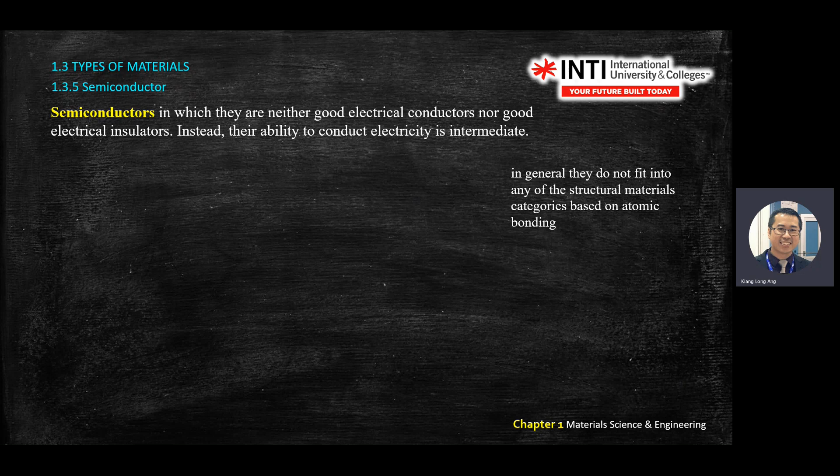So semiconductors are neither good electricity conductors nor good electricity insulators. Right? It depends on how you make them. Okay. So their ability to conduct electricity is intermediate, meaning they are between conductor and insulator. They're in the middle of conductor and insulator.

So if you look at the periodic table, they highlight the main ingredients that can make up a semiconductor. So you have those light blue here and a bit deep blue. All these highlighted elements can form semiconductors. The description you can read from the slides, but at least you can identify the elements that can form a semiconductor. Keyword for semiconductor, again, they are intermediate in their conductivity, between conductor and insulator.

Take note that semiconductors do not fit into any structural material categories. You cannot group semiconductors based on their atomic bonding. You know atomic bonding from your chemistry: single bond, double bond, triple bond, ionic bonding, covalent bonding. You cannot group semiconductors based on atomic bonding.

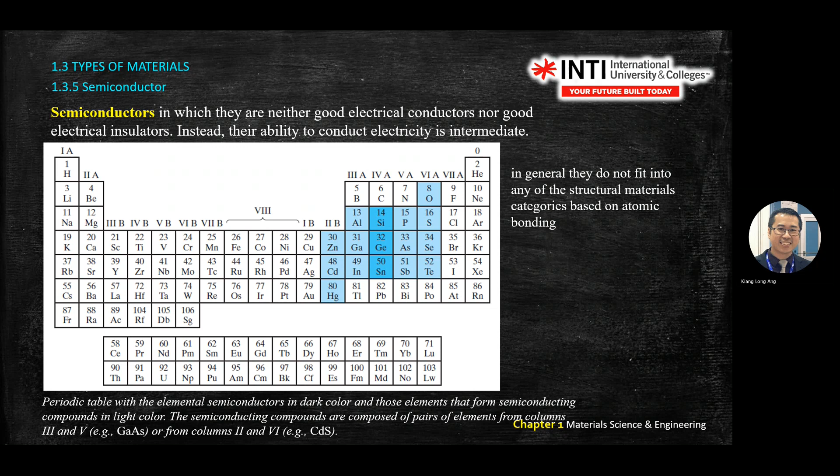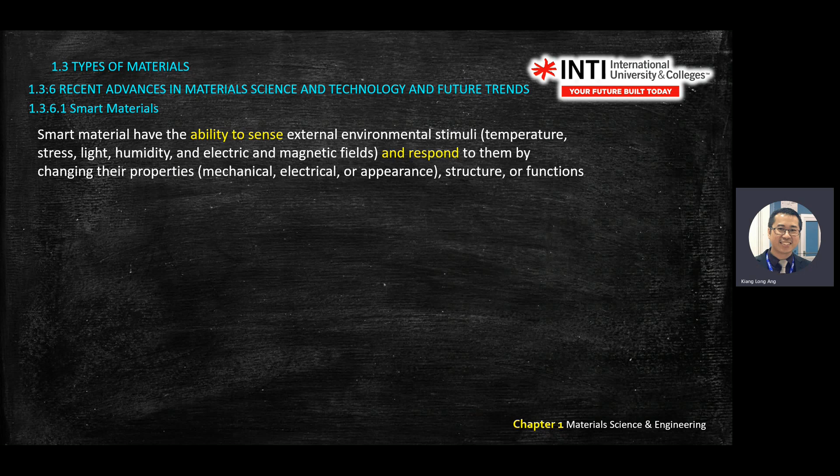Then this one is another add-in material, something we call smart material. In recent years, I think it's time that you are exposed to all these advanced materials. One of them is called smart material. Smart materials can sense and then react. They can sense and respond to the environment. Respond either by smell, color, mechanical properties, movement, motion, and so on.

Okay, so for applications, there are two big categories under smart material: sensor and actuator. A sensor means something that can sense a change. Sometimes smart materials just change color. For example, because I'm from the aerospace industry, if you take an aircraft, different heights have different temperatures, right? So as it becomes colder and colder, you can observe the wing color change. This is one of the applications of smart material.

Actuator means something that you push. A very traditional actuator is your syringe. You inject a vaccine with a syringe, that is an actuator. But that is very old tech. Normally we won't use actuator for the syringe. An actuator is something that can move. You pump in hydraulic movement and all this, then it becomes an actuator.

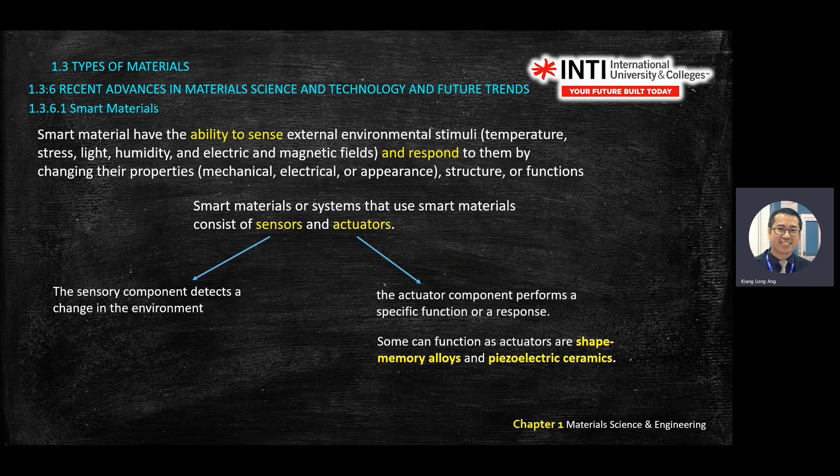In recent years, we go into nanotechnologies. So we have a lot of small robots that you can use for medical purposes. All these tiny robots or nano robots are smart materials that function as an actuator. Okay, so this is another smart material used in biomedical application.

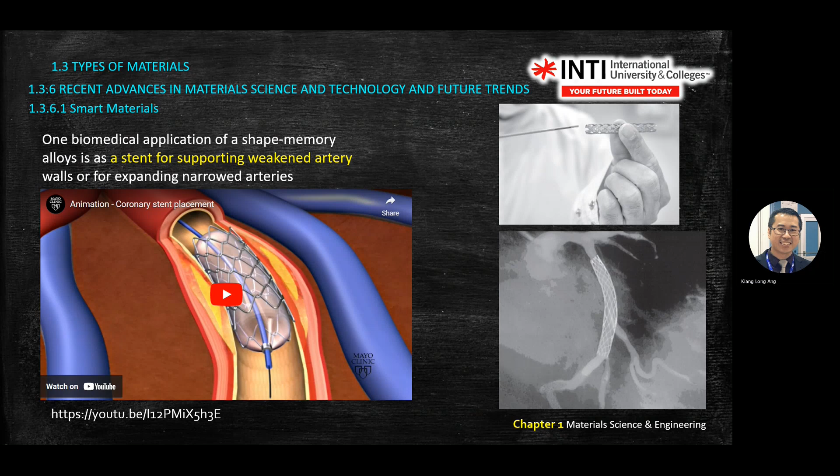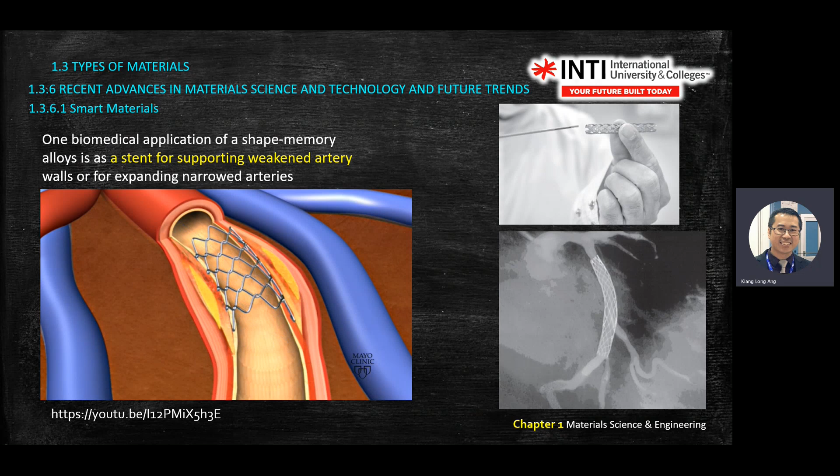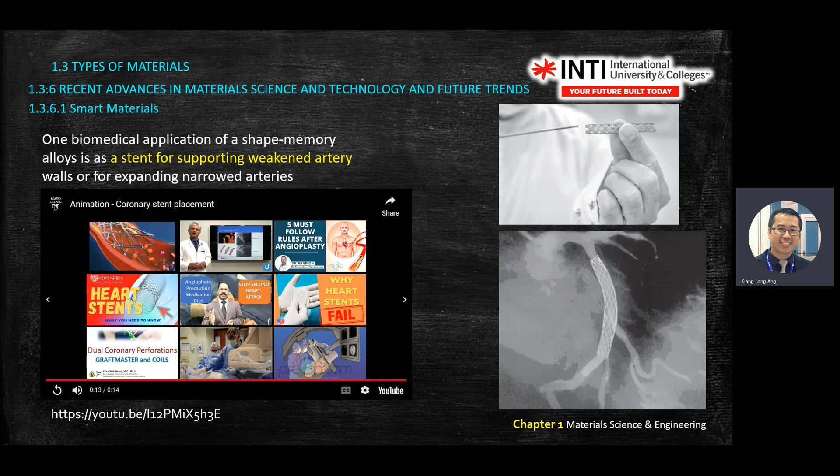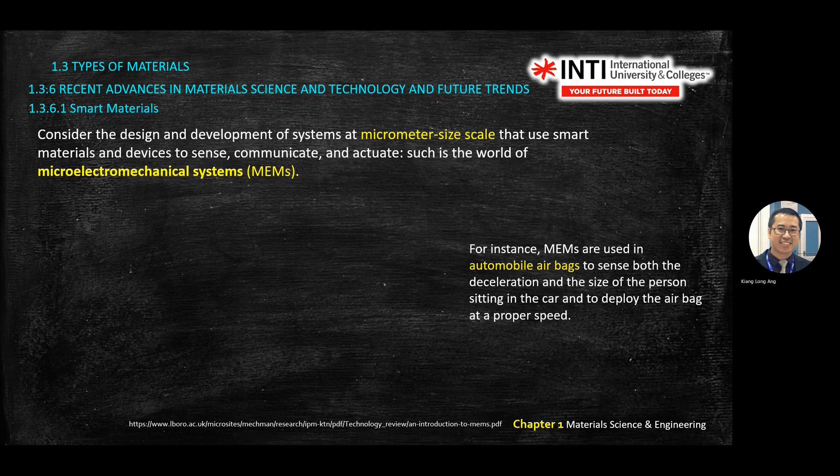So another example of smart material is called MEMS. If you go into the semiconductor industry, this is very related to mechanical properties, especially materials. MEMS stands for micro electromechanical system. For example, car airbags. MEMS are installed as a sensor. So if there's a high impact or the velocity changes beyond a certain limit, then the MEMS will react to that environment.

Okay, so this is one example of how they make MEMS. Micro means very small, 10 to the power negative 6, micro electromechanical system. One of them is the automotive airbag. So this is the automotive airbag MEMS. If you look under a microscope, there are a few layers, up to 5 layers.

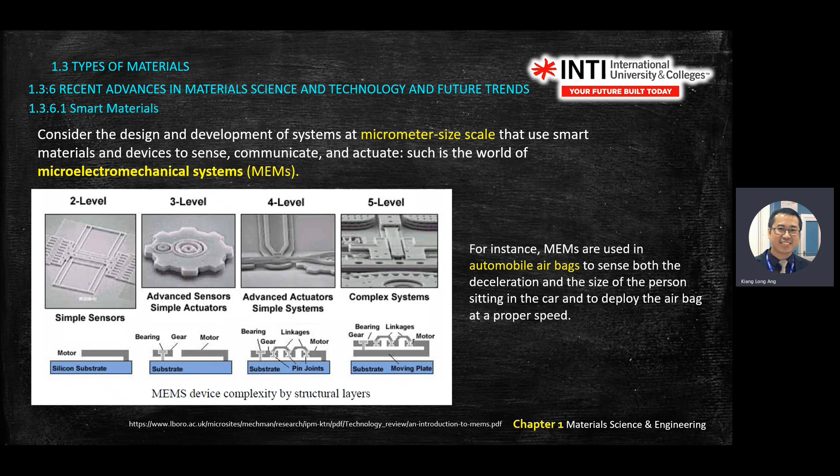Inside our smart cars nowadays, we use a lot of MEMS sensors. Airbag sensor, tire monitoring, all this. Pressure that you press on a material, then it gives you some reading. That also falls under smart material. Okay. So again, we looked into two classes, sensor and actuator. This is an example of application.

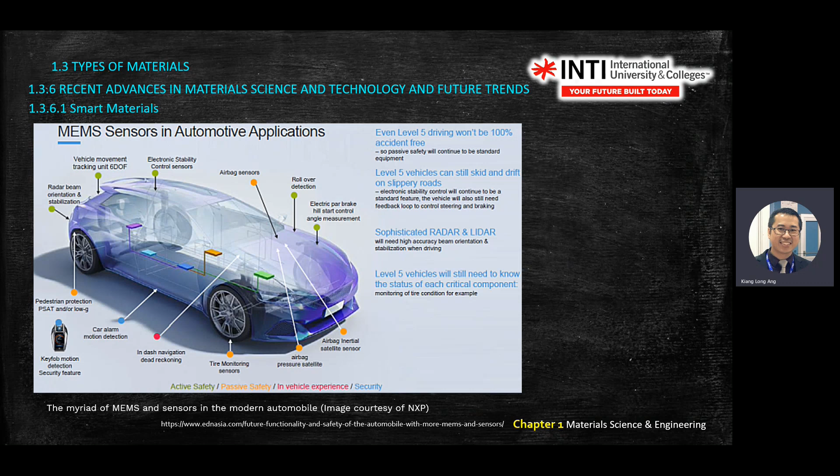Of course, I don't think I will ask you about smart material. Some lecturers, when they teach this material, take the smart material topic and give it as an assignment. But my way is a bit different. So I won't ask you to write a long essay.

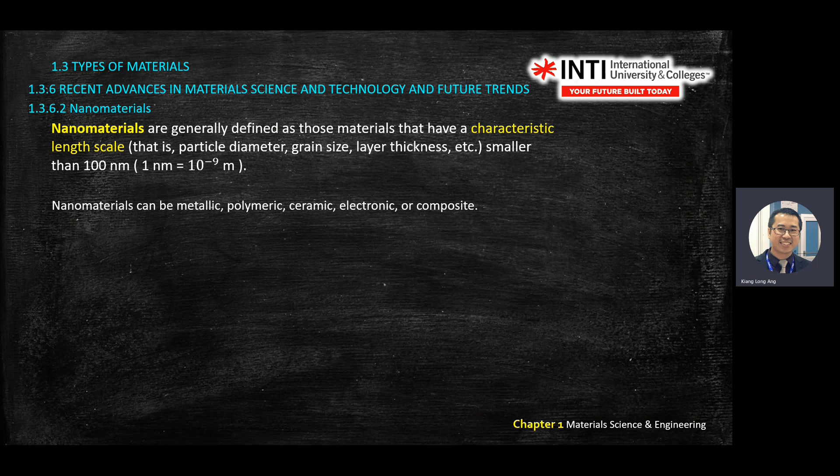Okay, nanomaterial is something at 10 to the power negative 9 sizes. So how you define a nanomaterial is that the size is below 100 nanometres. Okay.

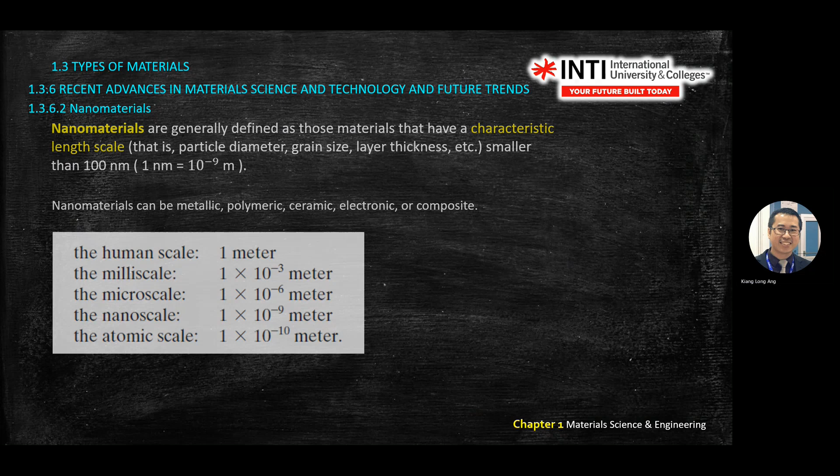Nanomaterial. This falls under microscope. You can see the microstructure. All this you read, because I won't ask you this question or for these slides. But I need to feed you some information about the advanced material.

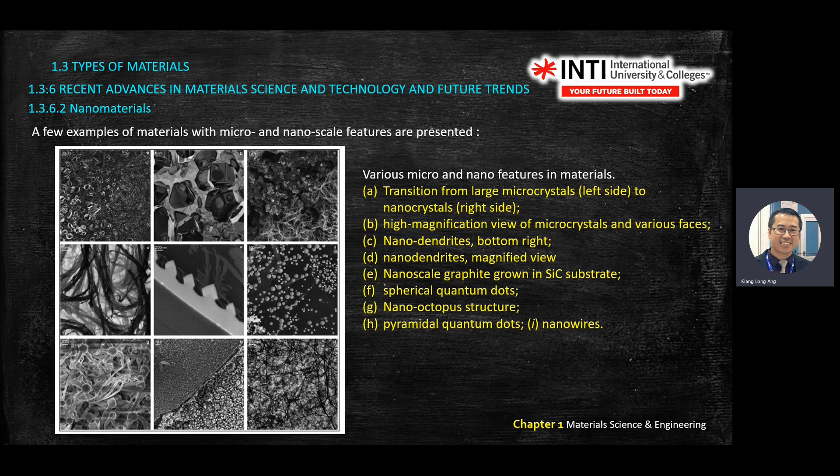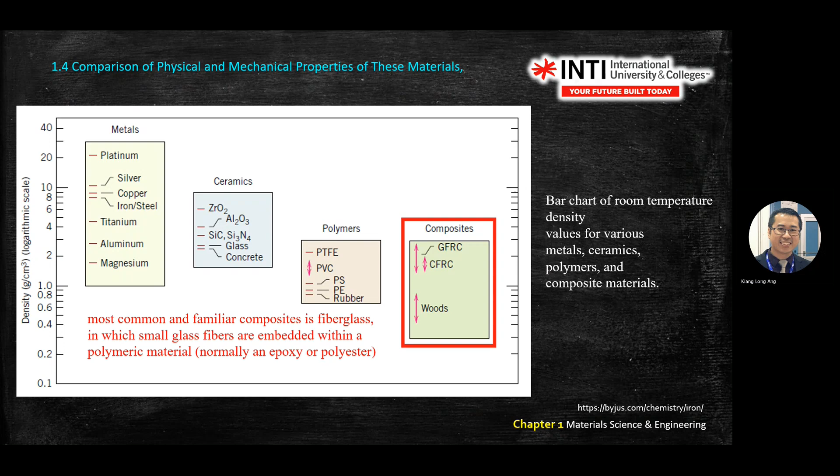Next graph. Just now was density. Now we look at stiffness modulus, or elastic modulus, Young's modulus. You learned about Young's modulus in your statics, right? Yes, no? Can you recall what is Young's modulus? No. Or you haven't learned? Okay.

Talk about force first. You can have pulling force. The term for pulling force, we call it tensile force. Then you have force going in, compressing the body, we call it compressive force. Then you will have twisting, we call it torsion. And let's say this is fixed. In your statics, you learn this symbol, it means fixed to the ground, and you have a force here, it will do bending.

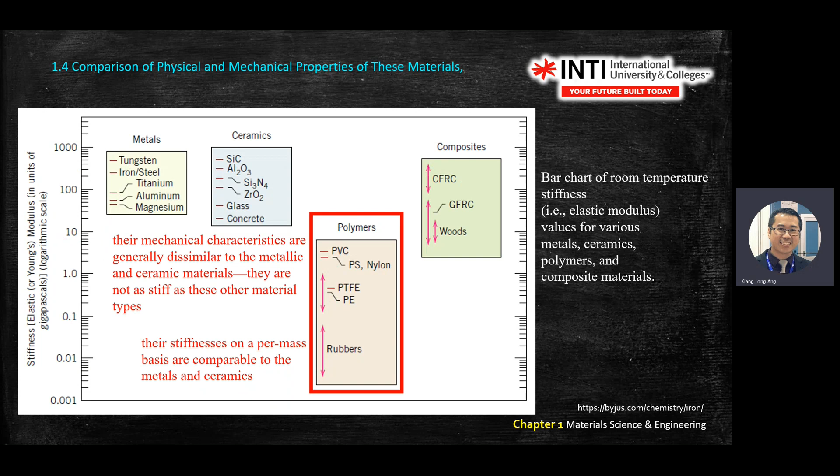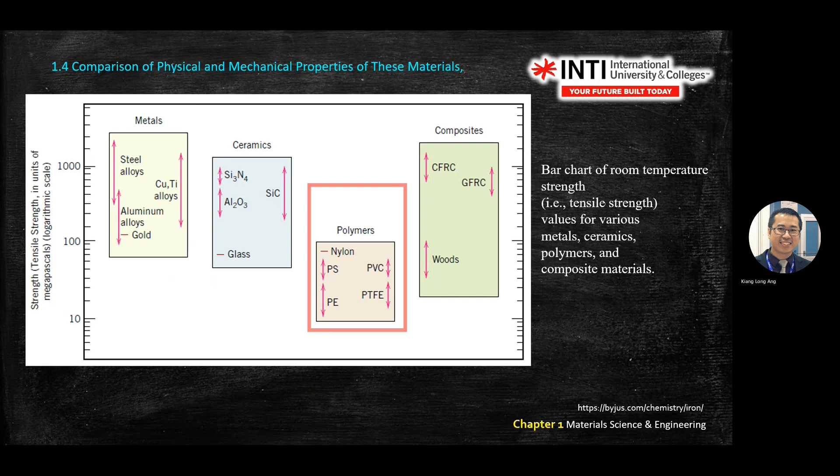So this is an example of the thing. So how useful is all this graph, or how do we ask you a question using these 4 or 5 graphs here? Normally it asks you to explain - these 3 graphs normally come up in application, section C in the final, about application, selection of material.

Selection of material - so it gives you a scenario. It gives you a scenario, for example it gives you strength, an X value.

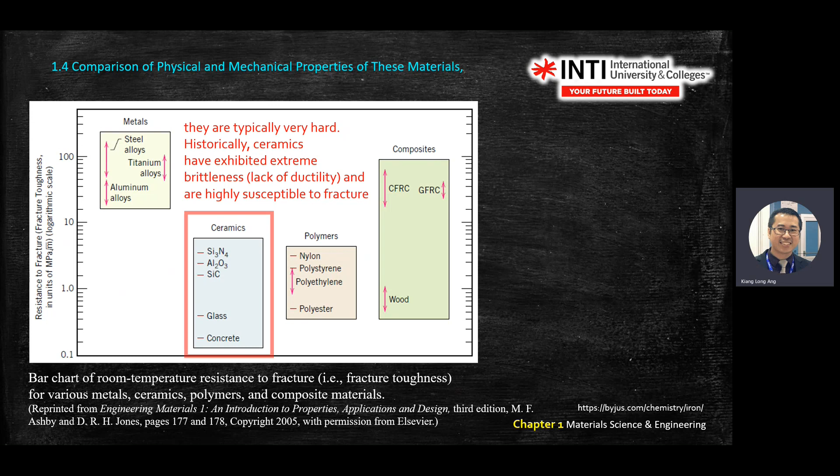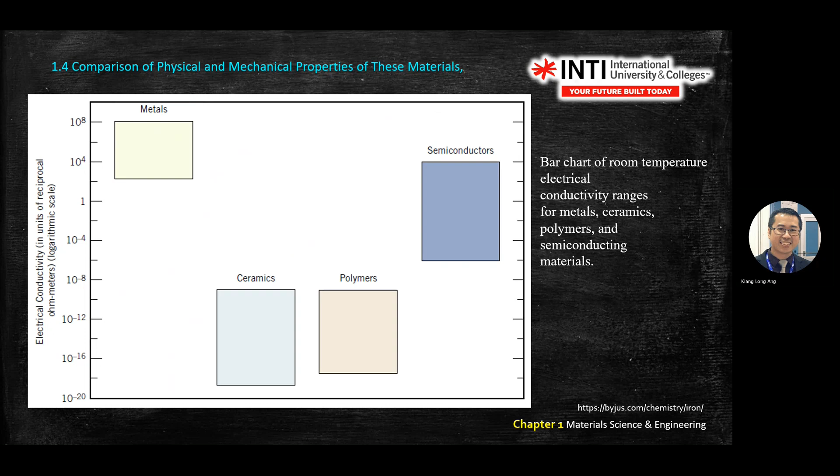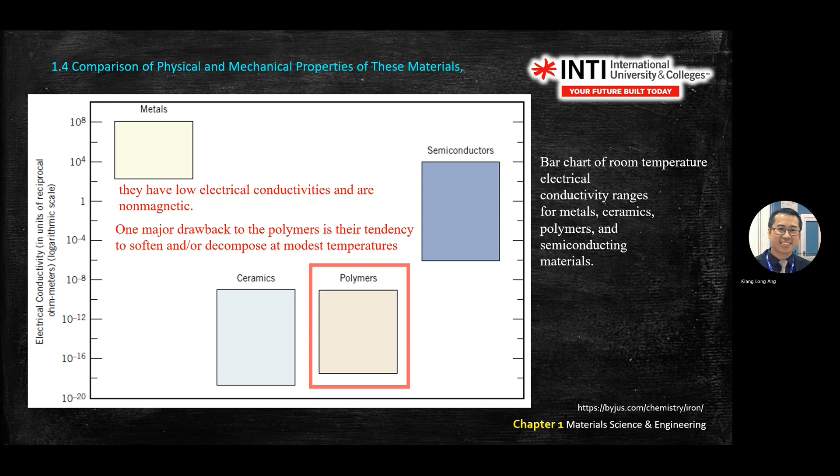This you can read, huh? So this one is another chart, electrical conductivity. This one explains what you have. The next one is called processing and selecting material. There are some proposed steps there, how you propose it. This one you can read.

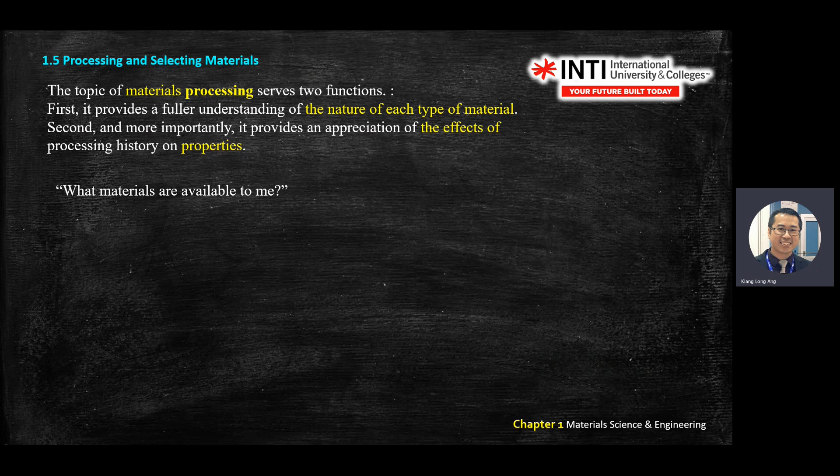You look at what materials are available to you. Then you look at the operation or application, like the example just now on the whiteboard. What are the materials you have? Then what are you going to apply? These are the application requirements. Then you select the material.

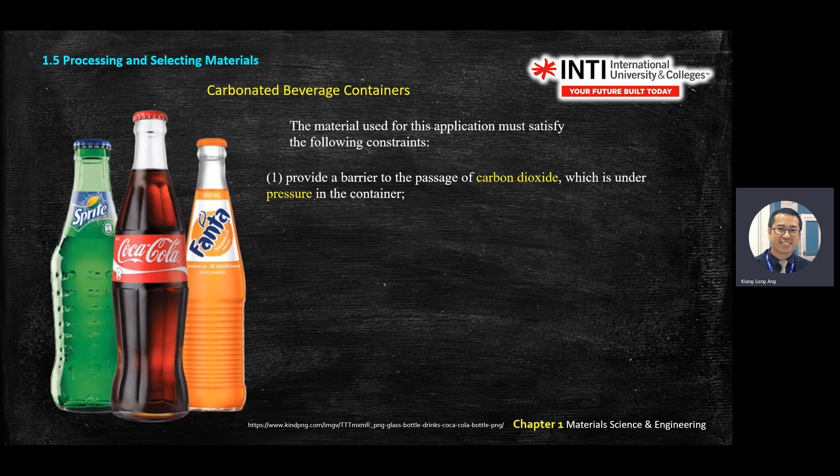Okay, so this is another example that tells you about the last section of this chapter 1, about processing and selecting material. You are familiar with all these drinks, right? So last time, these are the applications. So what are you as an engineer, or working as an engineer inside this factory? These are the requirements for your application. First, you need to provide the container that blocks CO2 in the container.

You know, all these carbonated drinks have CO2 inside, high pressure inside. So you need to contain the pressure inside. Then it needs to be non-toxic and non-reactive material. And you have to be relatively strong for logistics or transport. You have to be inexpensive in terms of costing.

So, this one's for consumer. Consumers are attracted by how things look, so products need to be optically transparent so you see what's inside. So these are the constraints you have.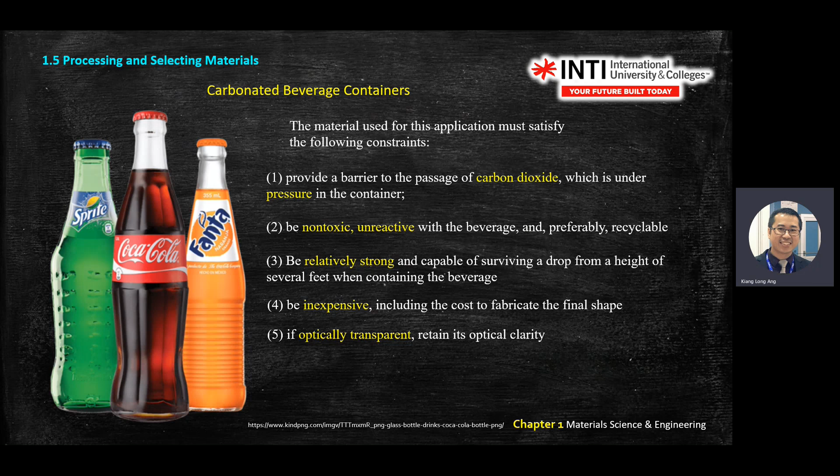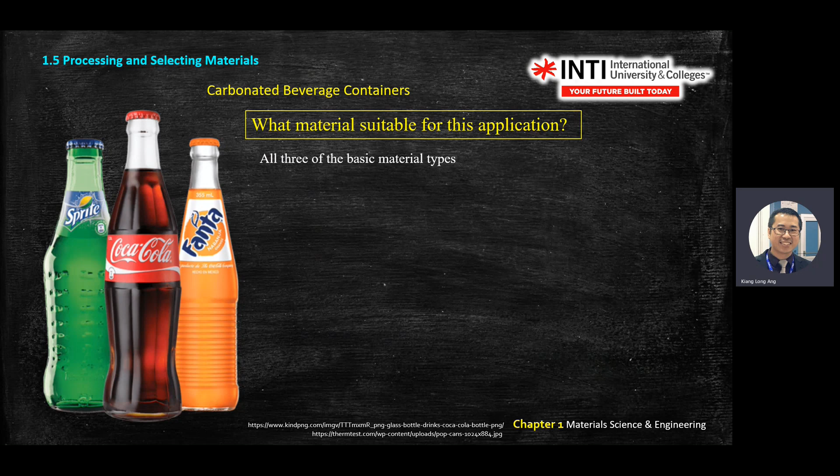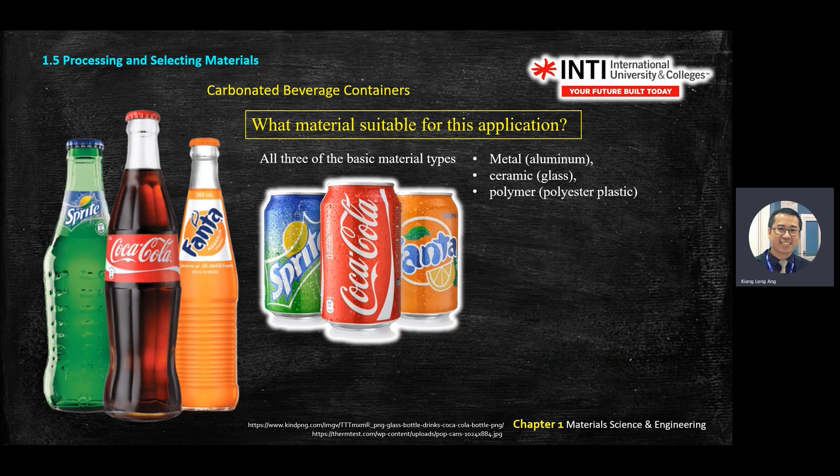So what are the materials suitable for this application? This section normally goes in the assignment as a long essay question, but for our module I won't put this setting. We have basic materials: metal, ceramic, and polymer, like what we learned in chapter 1. So we can choose glasses or the normal metals like aluminum cans. You need to analyze the pros and cons.

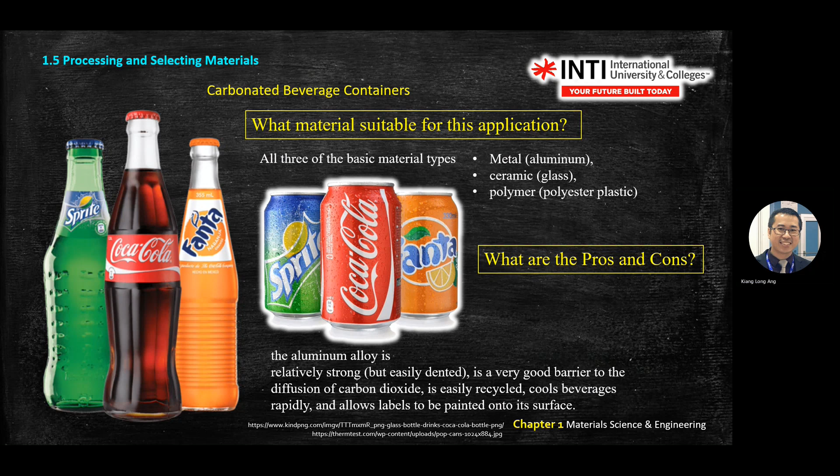For example, aluminum alloy is good, cheap, and light, but because of the chemical nature of carbonated drinks, which are acidic, if you store your aluminum can long enough, some chemical will drop out. I've seen this in my own case - I bought a carton of 100 Plus and forgot about it, kept it in the storeroom. During Chinese New Year when we clean the house, we found lots of liquid had come out below the carton. When we took the aluminum cans out, there was no drink left inside - it had seeped out from the container.

So this is some of the material consideration. As mechanical engineers, when we study materials, we need to consider this.

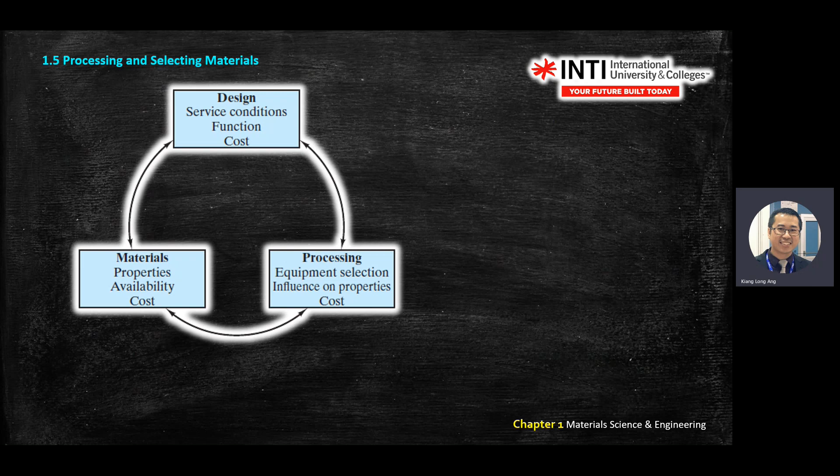These are the proposed processes. So you look at design, processing, and material - this is the relationship between material, process, and material design, how you do it.

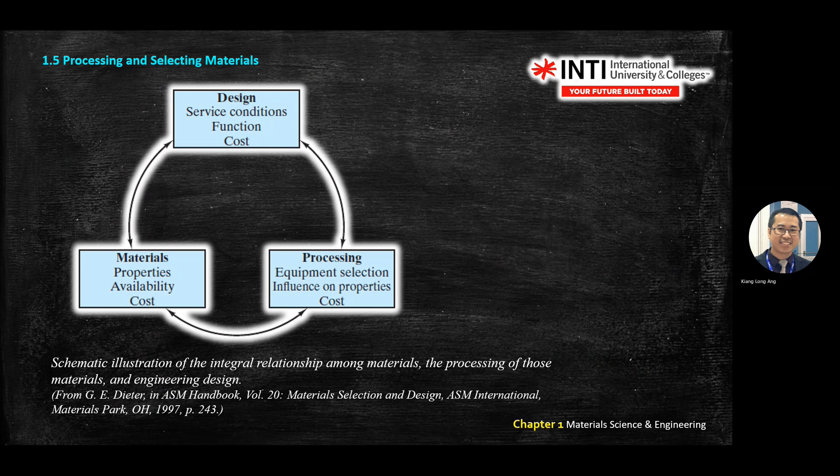This section on processing and selecting material normally comes in the final exam, section C, asking you to elaborate on application of material. This chart will help you elaborate on what we're looking for. In your test or final exam, section C, this diagram is very useful - you draw design, material, processing, and put in keywords like service, function, cost, properties, availability, equipment selection, influence. Then you elaborate based on the question given. It's a design question.

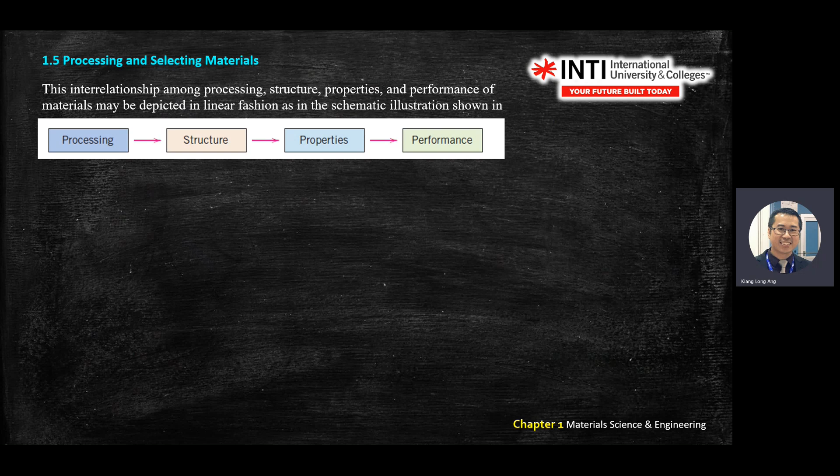This one we covered yesterday - process, structure, properties, performance. So this slide onwards will tell you which chapter covers certain topics. Let's say about steel - we focus most of our time on steel or ferrous materials. For steel, when we talk about processing...

Process, structure, properties, and performance. For processing, we have diffusion - there's a chapter specifically focused on the diffusion process, recrystallization for steel, and some diagrams. Then structures in chapter 2, you'll see microstructures and properties - mechanical properties, defect systems located inside, and so on.

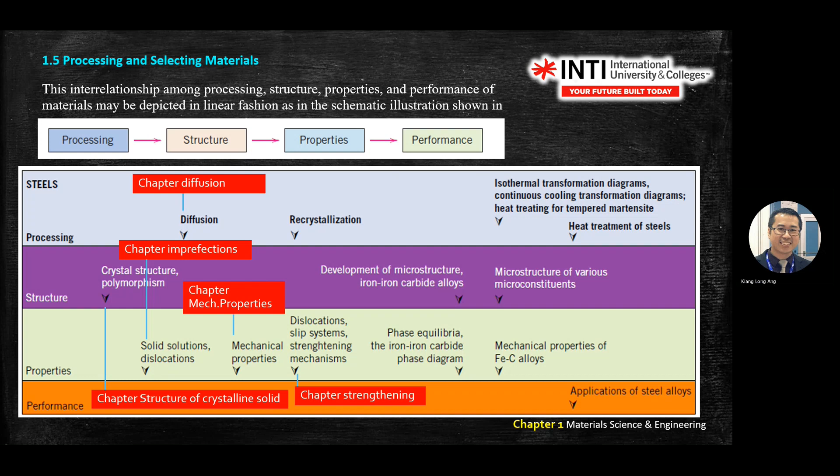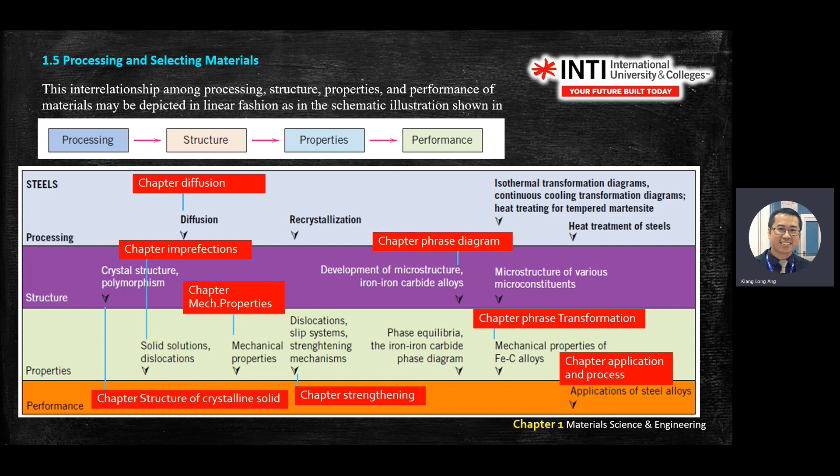Structure crystalline solid - I think this is chapter 2 or 3. You look at crystal structure, then defects, diffusion, mechanical properties, strengthening chapter, phase diagram, transformation, application process. Normally structure crystalline and imperfection will be in test 1, diffusion in test 1, and the rest will be in test 2.

Same thing applies to steel and ceramic - different process, different structure, different properties and performance. Each one will also have a chapter on it - glass ceramic and so on.

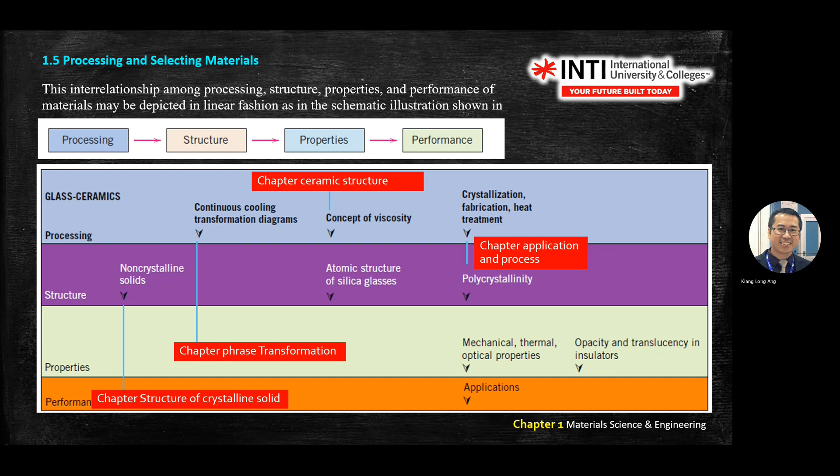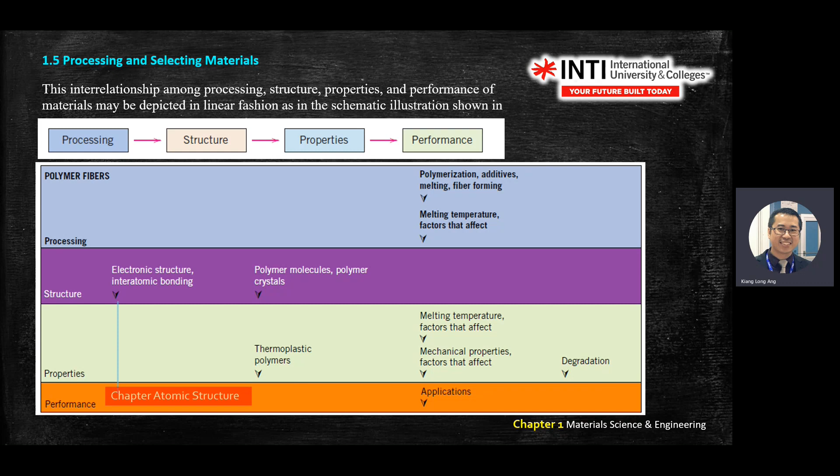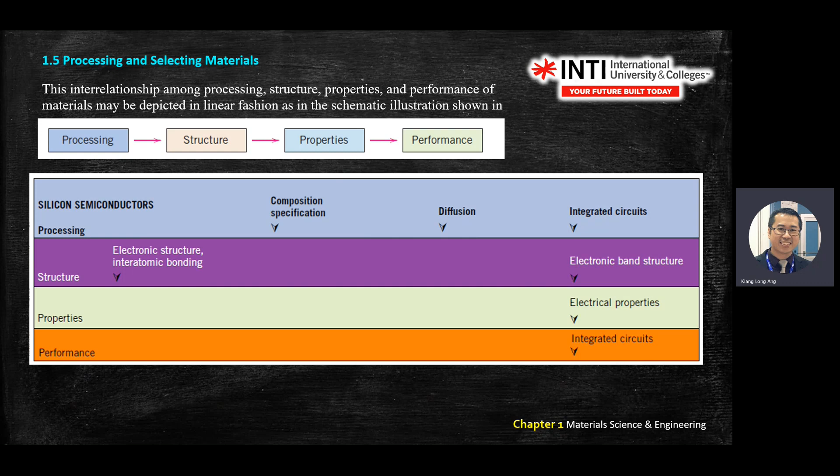Polymer fiber also has these four processes - processing, structure, properties, performance - and each has a chapter: atomic structure, polymer, and so on. Semiconductor is more on the final exam scope already.

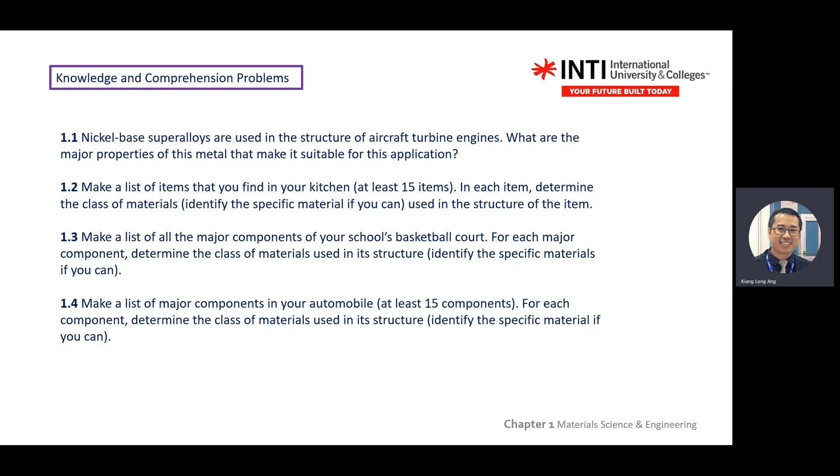So these are a few example questions you can try. You'll see these in the last section of my slides. Some chapters I didn't include because the slides were already too much, but most slides will include sample questions you can prepare for test 1, test 2, or the final exam, to test whether you understand what we learned in class. I'll show you - there are lots of questions there. For example...